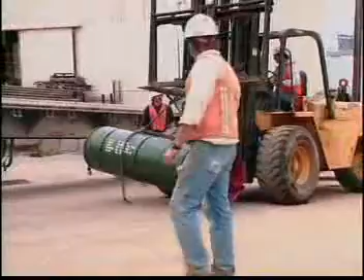Once the drive shaft has been prepared, the microtunneling equipment, which is thoroughly tested before delivery to each project, is transported to the drive shaft and assembled in position.

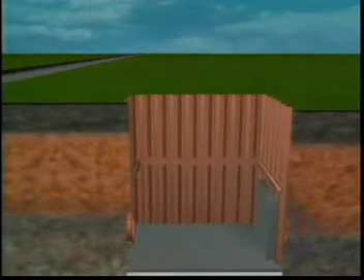The microtunneling equipment includes the operation cabin and remote control board, the jacking and lubrication systems, the slurry system, as well as ancillary equipment such as cranes, generators, and trucks.

Then the microtunnel machine, the real workhorse of the microtunneling process, is lowered into the drive shaft and onto the guide rails.

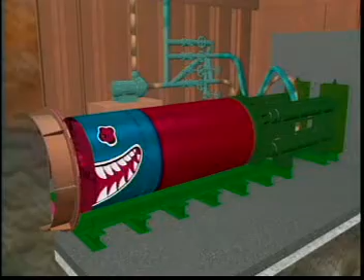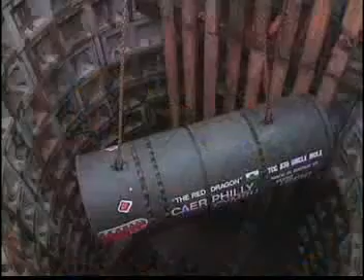Different types of microtunnel machines are available to cope with a host of ground conditions. Machines are available in a wide range of sizes, in diameters from 12 inches to 12 feet and beyond.

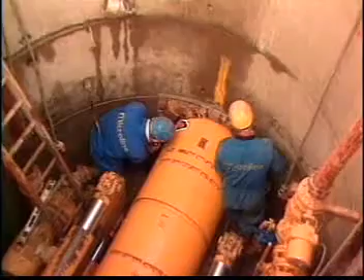Once the microtunnel machine is aligned on the guide rails, which have been set to the required line and level, all cables and hoses are connected to the machine, and the total system is tested once again.

The drive begins, and the microtunnel machine is thrust forward by the hydraulic jacks, first passing through the entrance ring, then tunneling through the ground on its journey to the reception shaft.

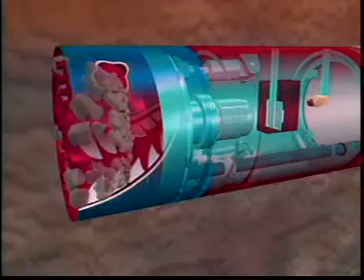Powered by electric motors, the rotating cutter head cuts through the earth. Excavated material is crushed in the head of the machine when necessary and passes into a slurry chamber, where it is mixed with slurry and transported to the surface via slurry pipes.

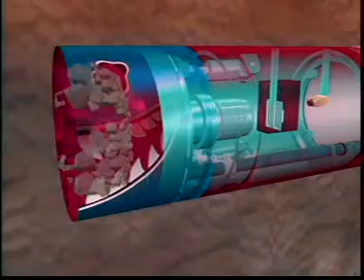During excavation, a sophisticated earth pressure counterbalancing system is employed. By maintaining a consistent counterbalance pressure on the tunnel face, always between the active and passive earth pressures, ground movements are virtually eliminated.

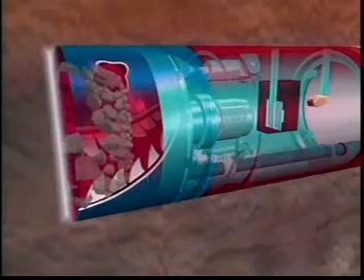After the machine has fully penetrated the ground, excavation is halted, cables and hoses are disconnected, and the first section of pipe is lowered onto the rails.

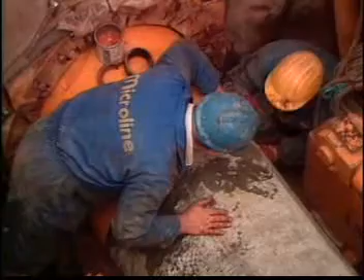The pipe is pushed up to the back of the microtunnel machine, where they are joined by an adapter ring, and all systems are reconnected. Then, together, they are jacked forward as the excavation at the face of the machine continues.

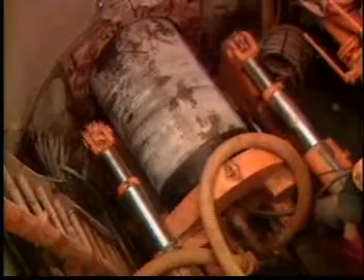On the completion of the jacking of one pipe, excavation is stopped. The jacks are retracted. Another pipe section is inserted behind it, then pushed forward, and the process is repeated until all the pipes are installed, forming the permanent tunnel lining.

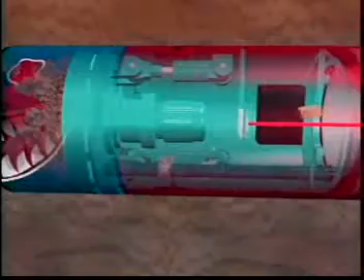The alignment of the machine and pipe is controlled using a laser-guided steering system. A laser beam originating from a laser at the rear of the drive shaft and set to the required line and grade is projected onto a target mounted inside the microtunnel machine.

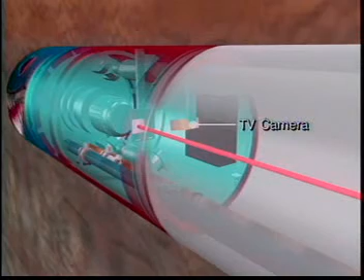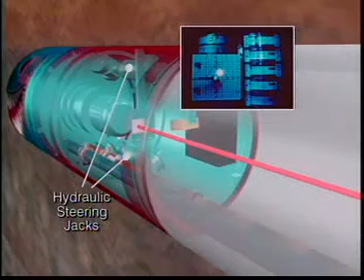An image of the target is captured by a TV camera and relayed to a monitor in the remote control board at the surface. The operator can activate hydraulic steering jacks inside the microtunnel machine as necessary to articulate the front section of the cutter head and alter the attitude of the microtunnel machine.

Accuracies of plus or minus 1 inch in line and grade are typically achieved over an entire drive.